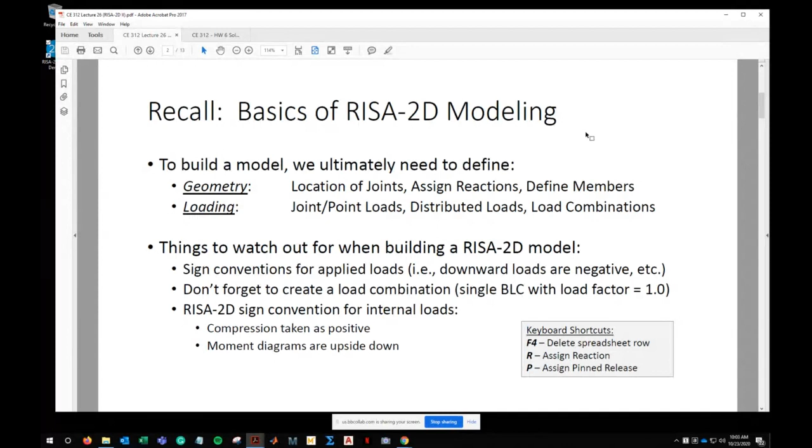Let's start talking again about RISA modeling. So let's review what we did last time. To build a model, we ultimately need to define two aspects of the model, the geometry and the loading. Today, we're going to add a third aspect to that, which is the stiffness, but we'll get to that. By geometry, I mean locating the points or the joints, assigning the boundary conditions or the reactions, and then defining all the members. By loading, I mean putting either joint loads or point loads on there, applying any distributed loads, and then building your load combos and running it.

These are some things to watch out for when building a RISA model. The sign conventions for your applied loads: the downward loads are negative, so make sure that you're good on that. Don't forget to create your load combination. It's really easy to forget to build that final step where you do a load combination with basic load case 1 with a load factor of 1. And then your RISA sign convention for internal loads: the moment diagrams are going to be upside down, and compression is taken positive. So when you're querying the results, make sure you keep that in mind.

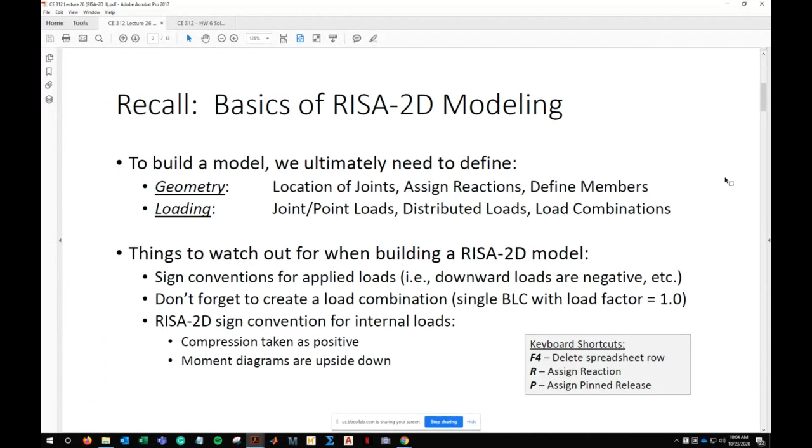Keyboard shortcuts. F4 will delete a row in a spreadsheet. R is what you use to assign a reaction, and P is what you use to assign an end release. Okay, before I get into deflections, I want to talk about some additional modeling items, and I just have kind of a slide on each of these.

It's nothing we really need to spend a lot of time on, but I kind of wanted to fill in some gaps. And so I want to talk about an internal hinge in a beam and a frame. I want to talk about roller supports that are inclined, and I want to talk about loads that are not vertical, that are at an orientation.

So let's start off with modeling an internal hinge. So if you want to model an internal hinge in a beam, let's say you've got a structural model and you want to put an internal hinge at a particular point. For instance, let's say we have an example here and we want to put a hinge right there, because we're going to do this problem later. What we would do is we'd put a joint at the point where we want to put a hinge.

And then what we do is we go into the member advanced data tab. So remember, when you build members, there's the primary tab and the advanced tab. The advanced tab is what you use to release the ends of the members so that you're modeling a truss as opposed to a frame. All you do is, if this is member 1 and this is member 2, you pin the end of member 1, on that right end. And that would create a hinge.

Usually when I do it, I do both. But in fact, if you do one, that should work as well. Again, it goes from how you model a truss. When you're modeling a truss, all the members are pin connected, so you pin the ends of every member. And it's basically the same thing here, you just place a pin on the end of the member where the hinge is going to be.

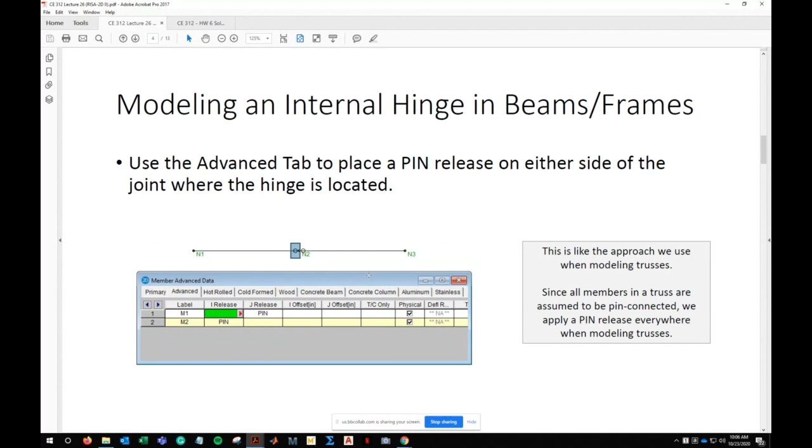And you can always tell that you've done that correctly, because if you look at your model, you'll see these little empty circles, like right here. I don't know if you can see that little empty circle. That empty circle indicates a moment release, and a moment release, that's a pin. That's a hinge.

What about an inclined roller? RISA does not allow you to model a roller at an incline. You can't really do that, but you can get around it and still get the same answer. So let's take this problem here. This is a problem I believe we did in class, and there's a roller that's inclined at 20 degrees. What you do is you pull the same trick. You put a hinge right here at the end of this member, so you can see how those little white circles indicate that I put a hinge on either end.

What you do is you draw a little short member that's at the same orientation as the reaction of the roller, and then put a hinge support right there. What you'll find is that if you compute I, the degree of external indeterminacy, both of these models are statically determinate, because you might have one more support reaction, but you also threw in an internal hinge. So the beam on the bottom and the beam on the top have the same condition.

As for modeling this little link, I'll call it a rigid link, what you do is you basically model it with an infinite stiffness, or make the stiffness sufficiently high, sufficiently rigid. The idea is that as the stiffness goes up, the deflections go down. So if the stiffness was infinite, then that joint would experience no deflection, and a joint that experiences no deflection is basically a support condition.

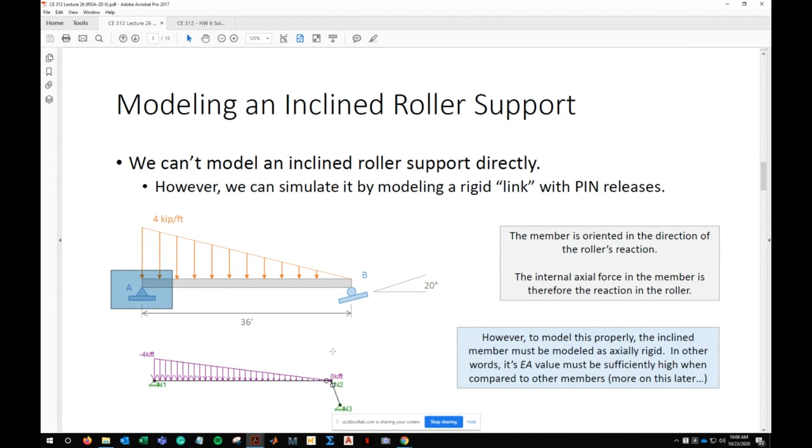In terms of modeling just a general load at an incline, RISA doesn't allow us to do that, but that doesn't really matter because I can take that and just model the X and Y components, and it's the same thing. So just use the slope ratio to compute the X and Y components and just model that. And so here you can see I've got this 20 kip load at a 3:4 slope ratio. I just modeled it as a 12 and 16 kip load.

Notice the signs. The 12 is positive. The 16 is negative because it's to the right and down. And also notice that I've modeled these as point loads, not joint loads. Remember, joint loads go on the joints, point loads go on the members. And so that load's applied to the member. I just put 12 and 16 kips at that same point to the right and down.

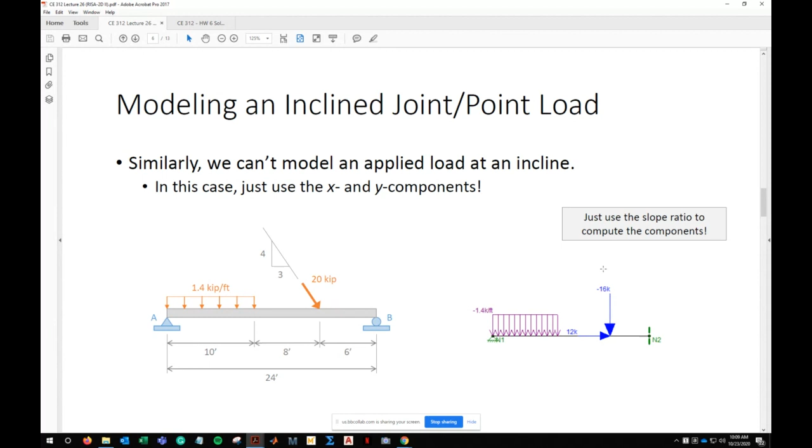All right, before I start talking about deflections, any questions? I know I probably threw a lot at you. I just wanted to sort of fill in some of the gaps before we move on. And I know one of the things with the inclined roller is that, in order to model it, you have to model that link as sufficiently stiff, as having a high rigidity. We haven't talked about what that means, but that's actually what we're going to talk about now. Any questions before we get into deflections?

All right, let's talk about deflections. So in order to model deflections, we have to introduce sort of the third aspect of our modeling. We have the geometry, we have the loading, and the third aspect that we need to get right is the stiffness. This word stiffness is really going to be kind of a key term for us later on throughout the semester. But basically, if you want a simple definition, stiffness is sort of the ratio between the applied forces and the resulting displacements. So a structure with a higher stiffness would result in lower displacements.

In modeling, what does that mean for creating a structural model? It means ensuring that you've got the E value specified properly for your materials, the Young's modulus.

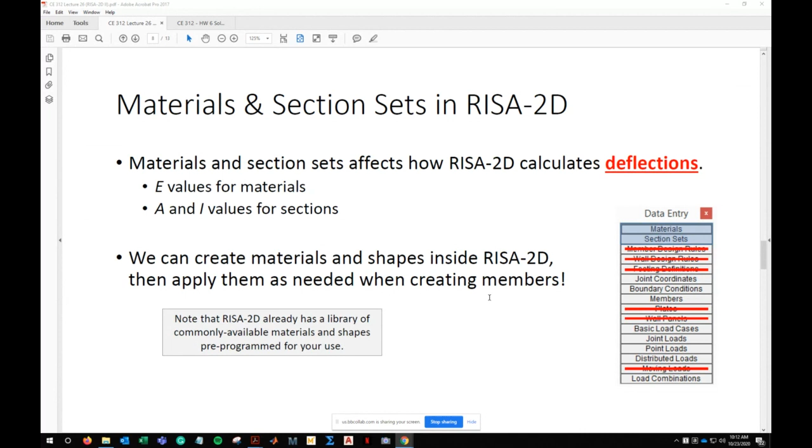The way that the process works is, in order to assign materials and section sets, what we're ultimately trying to do is affect the properties of the members. It doesn't affect the joints or the loads or the boundary conditions.

It's all about the members. So the first thing that you need to do is you need to look at your materials. Now we can build our own material, which is what I've done here. You can see I've created this thing called Greg's alloy.

So I went in here and I created Greg's alloy that has a Young's modulus or an elastic modulus of 25,000 KSI, and I left all the other properties 0 because I really don't care about them for the purposes of my analysis. So we'll say Greg's alloy has a Young's modulus of 25,000, and we create that.

The next thing that we do is we create the shape of the member. So the idea is, let's say I'm looking at my rubber beam, here you can see on the camera. So what I'm trying to do is define the material, what this thing is made out of, and then I'm trying to define the shape. And what I mean by the shape is this: this is an I-beam, so I'm trying to define the numerical properties that define this I-beam.

And so that might be its cross-sectional area, what's the area of this shape, the stiffness about the strong axis, and the stiffness about the weak axis. And I'll talk about what that means here in a bit. And so you can see here I've created a shape and I've called it Greg's shape.

Okay, and notice how Greg's shape has whatever properties I define, but then I assign Greg's alloy to that shape. So I've said here's a shape and it's made out of this alloy. We'll call it Greg's alloy. And so now I've got Greg's shape.

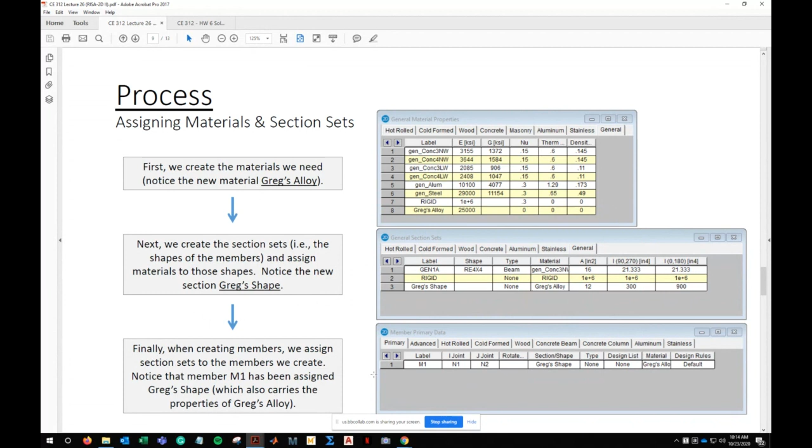One thing that I want to make sure that everybody's clear on is the moments of inertia. So if you look here on the table, if you specifically look at this part, there's 2 columns for moments of inertia. And it might be a bit confusing, like why is there an I and it says 90, 270? Why is there one that says like 0, 180? Like, what's the deal? The deal is the different ways that you can bend a beam.

So the way that I like to describe this is, if you're building, let's say, a deck outside your house, right? So here's the deck. You can see they've already dug their holes and cast their concrete piles, and they framed out the deck. Look at the joists here. See this joist. Notice how they oriented the joist so the long side is facing upwards.

Now, before you started learning engineering, if you've ever done any type of carpentry or work on your house or whatnot, that's just the way that you do it. That just makes sense. But there's a reason why you do that.

The reason why is if you compute the moment of inertia of this rectangle, because that's a rectangular shape, what you find is that the moment of inertia when the beam is facing upwards is much higher than the moment of inertia when it's facing sort of horizontal. So this would be sort of, we'll call it its vertical orientation, and we'll call this its horizontal orientation.

And so because the moment of inertia is higher, what it means is that beam is stiffer. It deflects less under the same amount of load. I mean, imagine if you had like a yardstick in your hand. The yardstick's really flimsy about that weak axis, and that's why we call it the weak axis. But if you try and bend it about its strong axis, it's pretty stiff.

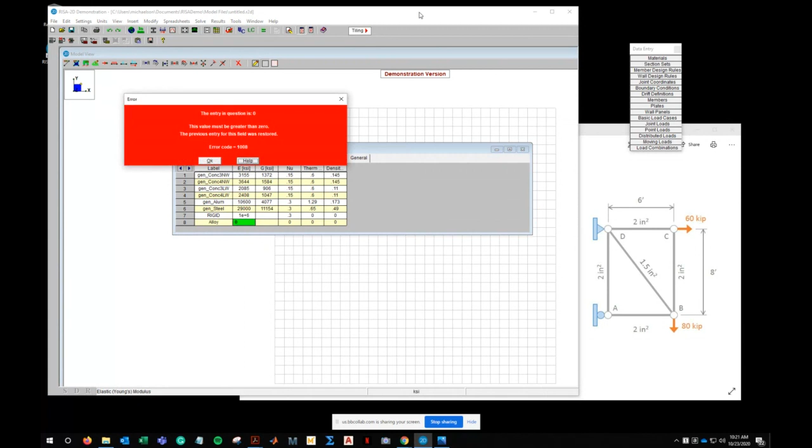I'm going to create my new material. We'll call it alloy. Okay. Now the problem states that E is 29,000 KSI, so 29,000, and we'll make everything else 0. You don't have to do that, but you can. I'm using the tab key, by the way. So if you're wondering, how is he going so fast? I'm just using the tab key to cycle through.

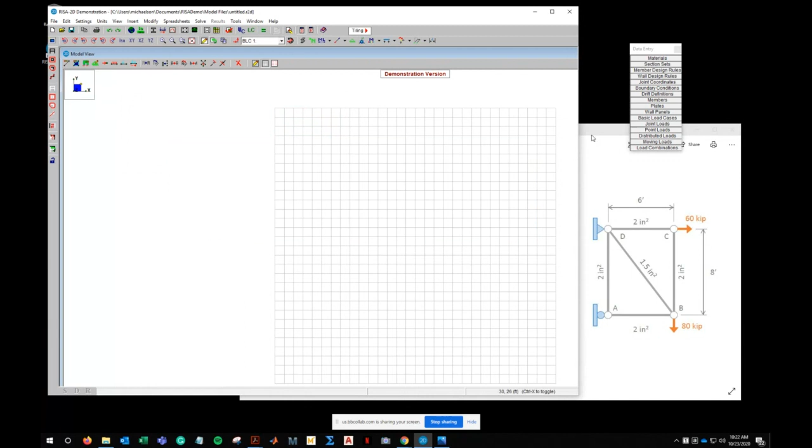Okay, and so I've got my alloy created, and I like to use the word alloy. I'm not a big fan of the word, but the word alloy doesn't really show up a lot in the native material property definition. So whenever I see the word alloy, it's like, oh, that's something I created, so I know it's the material I need. Okay, so there's the alloy, and it's already created. We can close that, and you can always reopen it, and you'll see it's still there.

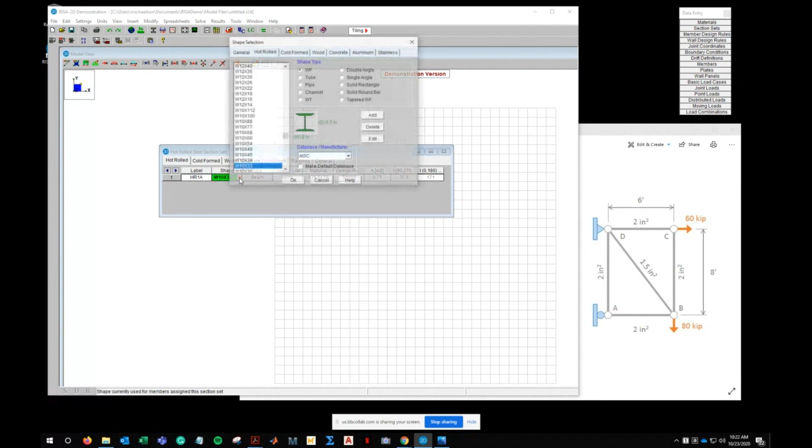Okay, so then we move on and we go into section sets. Okay, now I want to show you a couple things. So there's hot rolled section sets, wood, concrete, so on and so forth. What you can do is, let's say you're using a hot rolled section set. You can go in and say, well, the default is a W10x33. No, I want something else. I can check that, and look, all the shapes are already built in.

All the pre-built shapes, the W shapes, the channels, the angles, all that stuff is already there. You can even find Canadian shapes and Chilean shapes and Indian shapes. I mean, all these different standard sections are already here. What I'm going to do is I'm going to go into general, and I'm just going to make my own. I just wanted to show you that all that stuff is here. So we'll create our own shape.

Now let's go back. Let me move this up here. How many different shapes do I need? Well, remember with this truss, all the members had an area of 2 square inches, except for the diagonal that had an area of 1.5 square inches. So if I'm naming these shapes, maybe what I'll do is I'll name it T2 and name it T1.5. I just made that up, T2 and T1.5.

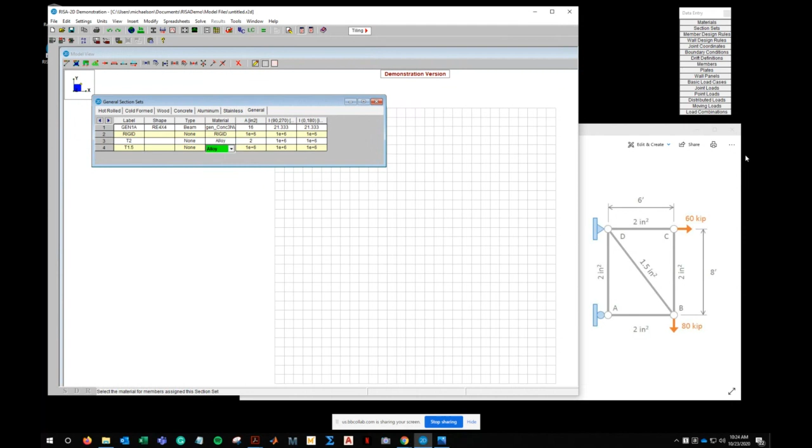As for the member type, I'm going to leave that blank. The reason for the selection is so RISA knows how to do the design checks. We're not in a design class, so we don't need to worry about that. The material, we'll change that material to alloy, and then we'll change the area. So the area here is 2, and this area is 1.5.

Now, one question I could always expect at this point is, some of you are like, well, Dr. Mike, I know what the areas are, but what about the I values? Well, here's the answer. I don't care what the I values are. The reason is by pinning the ends of the members when I model a truss, there isn't going to be any moment. And if there's no moment, and there's no flexural bending, the I value isn't going to affect my analysis. I'm just going to leave those as whatever value they are. You can see it's like 1 million. It's not going to affect anything.

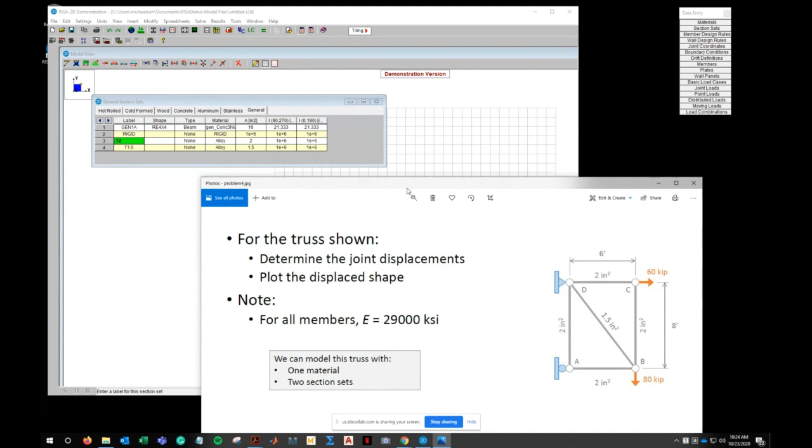Okay, let me close this spreadsheet. Okay, we haven't built any modeling yet. We've just done some of the work in the background with the materials and the section sets. But everybody with me so far? Any conceptual questions before we keep on trucking? All right, and please don't hesitate to interrupt if you got any questions.

Okay, I'm going to go now to start to define the joints. With this truss, I'm going to need 4 joints, so 1, 2, 3, 4. And turn my caps lock on. We'll call that A, B, C, and D. And as for the origin, I'll define A as the origin. So that's going to be 6 feet. That's going to be 6 feet. And that's going to be 8 and 8. So if I close this and maybe zoom in a little bit, there's my truss. You can see A, B, C, D. There's the 4 joints.

Okay. Yes, sir. If one of the supports had a moment reaction, would that mean that we would need I values for the entire truss? You're talking about a fixed support? Yes. That's a great question.

The short answer is yes, but keep in mind, trusses by themselves, when you pin the ends of the member, they carry no moment. Here would be my point. If you modeled this truss and only put a single fixed support, by pinning the members, what you're going to find is that moment reaction is 0, and then you're only going to have 2 reactions. A truss with 2 reactions is unstable, and so the model won't run.

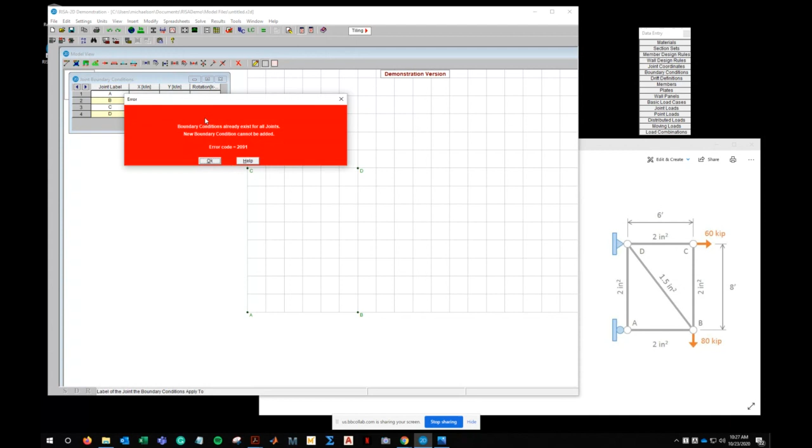Boundary conditions, we've got 1, 2, 3, 4. And again, if you press enter, it's going to get upset because you can't define boundary conditions for joints that don't exist. Okay, so here's my truss. Oh, I've got something labeled incorrectly. Hold on. I need to look. You can see here. Look at my C and D, I've got those backwards here. I need to flip those around. So maybe make this 6 and make this 0. I need to flip those around.

Nobody caught me on that. Shame on you. I'm just messing around.

Okay. So let's define our boundary conditions. Joint D. Joint D is a pinned reaction, so it's going to be R and R. So it's going to have a pinned support. What about support A? What's the reaction going to be at support A? Making sure you all are paying attention this Friday morning. There we go. Yeah. So X direction only. And so we just type the letter R. And again, I'm just using the arrow keys to go back and forth. Okay. So here's our truss.

Now, in terms of defining the members, here's how I'm going to do it. The first thing I'm going to do is ensure that the members are where they need to be. I'll assign the properties later. I'm going to need 5 members. So 1, 2, 3, 4, 5. Okay. So first off, let's just draw the members. So the first one is member AB from joint A to joint B. Then we'll do the next horizontal. We'll call that CD, from C to D.

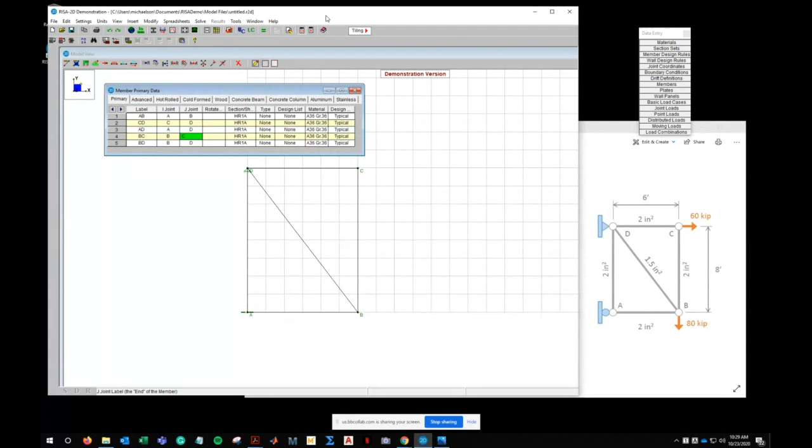So if you remember, all of the horizontals and verticals have an area of 2. So if you look at this right here, the horizontals and verticals have an area of 2, but the diagonal has an area of 1.5. And so I'm going to go into section sets, and let's test everybody's memory. If you go into section sets, remember what I named them. See how I named them like T2 and T1.5? So what I'll do is literally with my keyboard just type T2 down, T2 down, T2 down, T2, and T1.5.

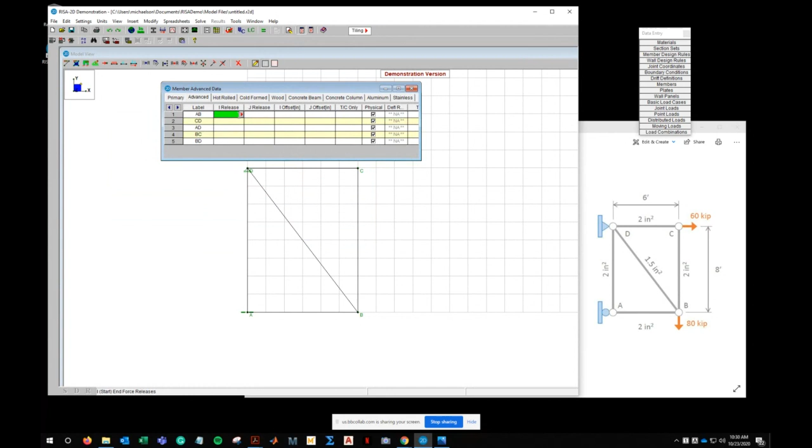And so I'm using the name that I assigned here, and look what it did. Not only did it assign the section, but look at the material. It knew that the material needed to be the one that I created. So all of that's already built in. Now, the final thing that needs to be done before we go on is this is a truss. So because it's a truss, we go into the Advanced tab and use that letter P and pin the ends of all those members. And you'll know that you've done that right because you'll see those little circles that show that the members are pinned.

Okay, now let's check this modeling out. I got 2 more things I need to do. I need to load it and I need to apply a load combination. We got 2 loads here that are applied at the joints. So before I do this, do you remember this button right here? I'll use my data entry toolbar to sort of point it. That button right there on the top left corner, we need to turn that on so that when we create the loads we'll actually see them. That's telling RISA to turn the visibility of the loads on.

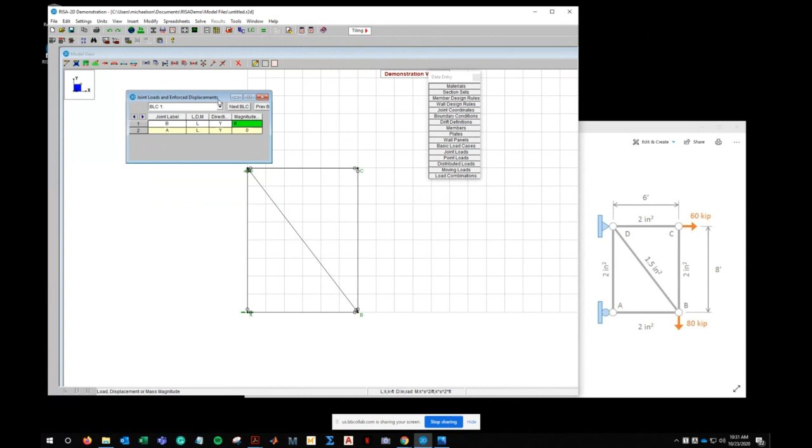We're going to do joint loads. I got 2 joint loads I need to create, one at C and one at B. Let's do it alphabetically. Let's do the one at B first. That's a joint load at B in the Y direction, -80, going downwards. For joint C, in the X direction, and that's +60. There you go.

Other than the load combination, which I'll go ahead and do that now, so don't forget the very end, load combinations, create a load combination and put 1 for a load case, a load factor of 1. You can do any one of those pairs. Now my model's done. Model is done, model is created, ready to analyze. I'm going to go ahead and analyze it.

So remember, we could do the solve button or the equals button. We'll do the equals button, hit solve. Boom, we are done. You know you're done because you'll get another toolbar that pops up. Here's your joint reactions. Let's look at the joint deflections. What did we get when we did this problem in class? I think we did the vertical deflection and we got 0.401 inches when we did this problem in class.

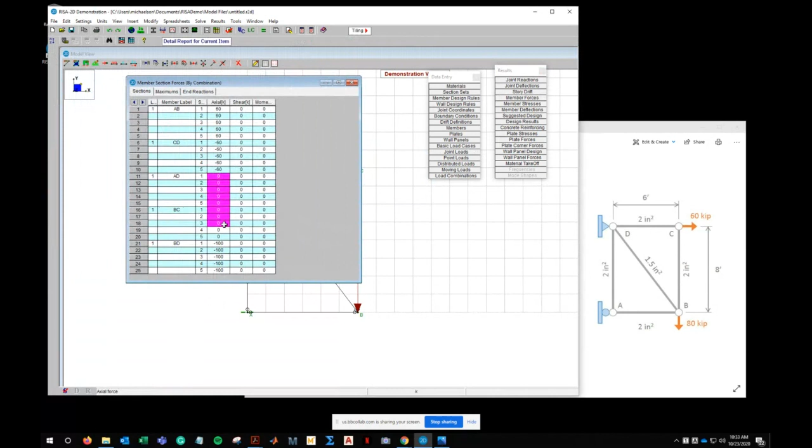Exact same answer here. Pretty slick, and keep in mind we got all the other answers that we also like. We got all the joint reactions. Here's the reactions. Here's the forces inside the members. Remember, we had some 0 force members in this truss. Pretty slick stuff. Let me show you a couple of things that I think are pretty slick.

First off, I want to show you the model display options. So view, model display options. So again, this is the same stuff we did before. We can turn on all the reactions, and now we can see all the reactions that are there. If you want, you can look at the axial force diagrams. Kind of boring because they're just constant forces along all the members, and so you can see, okay, we've got 60 kips in tension, 60 kips in compression, 100 kips in tension. Again, it's kind of boring.

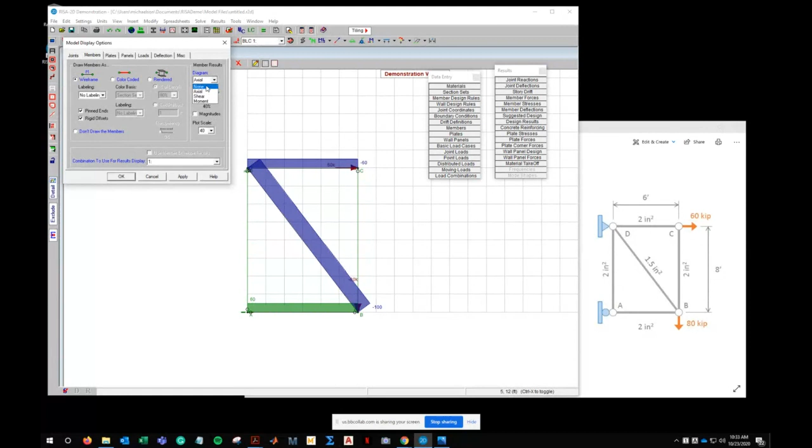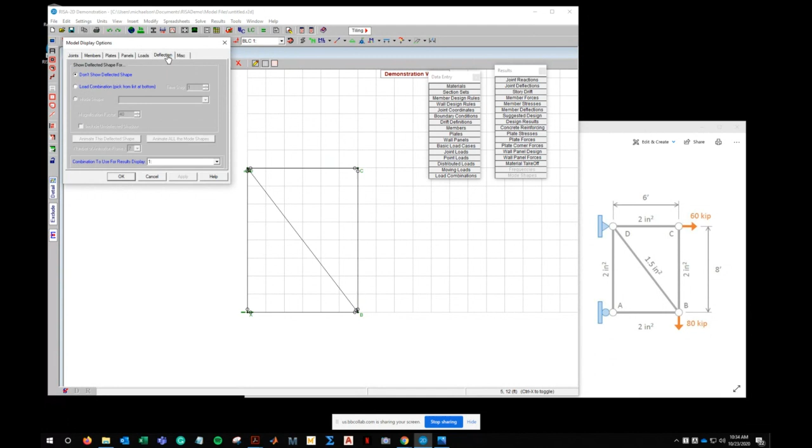But what I think is really the star of the show is the deflected shape. So what I'm going to do is I'm going to go into loads. I'm going to turn those loads off. I don't want to see those because I just want to see the structure. Now check this out. This is pretty cool. Let's go into deflection. Now I want to show the deflected structure, and let's hit apply. And what it does is it does that.

Now, first off, that looks probably a little wonky, but I want you to think about the numbers. This structure is what, like 8 foot tall, and it only experienced a deflection of 0.4 inches. What RISA is doing is it's magnifying those deflections so that you as the user can see them. It's using a magnification factor of 40. So maybe I'll tone that down a bit. Let's do a magnification factor of 20. Maybe that's a little easier, a little more realistic.

And if you hit this little check mark where it says include the undeflected shadow, now you can see what the truss looked like before and after. So this is before you apply the load, here's after you apply the load, and you can see how the truss forms. Notice at joint D, it didn't move at all. And at joint A, if it were to move, it would only move up and down. It wouldn't move left to right because of the reaction at A.

If I want to get fancy, I can animate that. And you can see it's going through that, start to finish. Just did 7 frames of animation. Any questions on this?

That's a great question. Can you change the way the loads are plotted? If I'm being honest, not really. RISA sort of has a standard way of plotting the loads, the boundary conditions, so on and so forth. Now, what you can do, let me turn the animation. Let me turn this off.

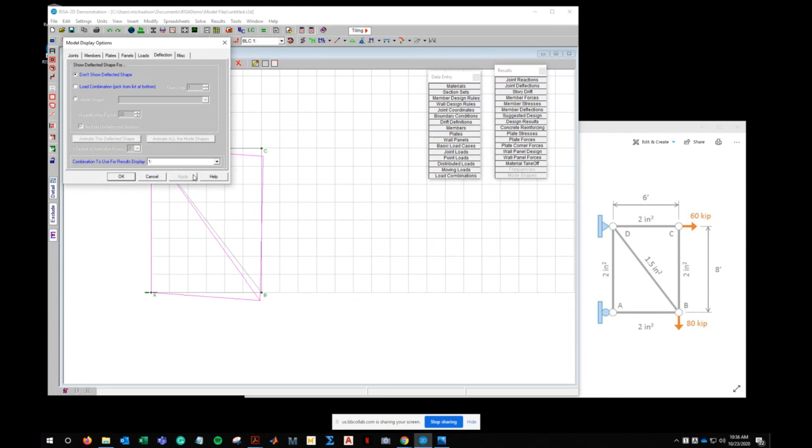Hold on. Turn the animation off. Now, one thing that you can do is you can turn some labels off. For instance, if you go up here, this little toolbar, I'll use the data entry. Like I'm talking about this toolbar right here, that right there. You can turn off the node labels.

You can turn off the boundary conditions. You can turn off the labels on the members so that all you're seeing is just the truss. You can do that. You can't really change the direction of how things are applied. I know there are a couple things that you'd like to tweak, but such is life. Any other questions?

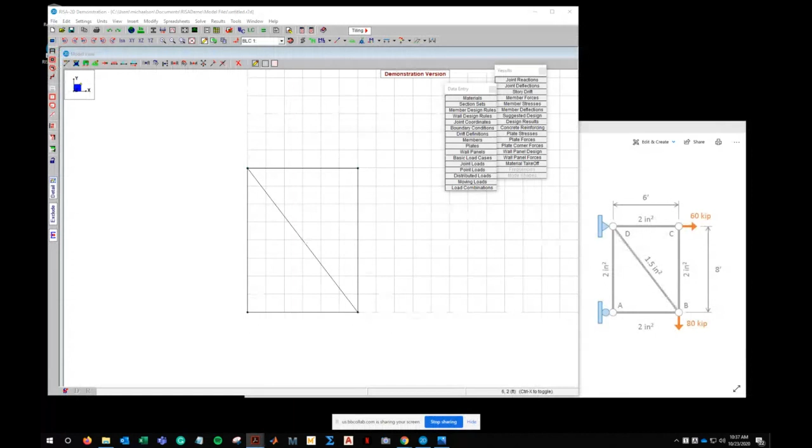Because I want to give you all a chance to model one of these on your own, and I'll build it with you near the end. All right, I'm going to pull up the slides. I want you to see if you can do this one. Okay, this is an overhanging beam. I want to determine the vertical deflection at B, the rotation at D, plot the deflected shape, so on and so forth. Now, let me say one thing.

In order to model this structure, you do not need to place a joint at B. However, placing a joint at B does make it a little easier to determine the deflections at B because RISA automatically says, okay, here's the deflection. So I want to model this structure in RISA. We'll go ahead and place a joint at B. We only need one material, one section set, 4 joints. We have distributed loads. We have a joint load at 15 kips.

I'm going to give you all a few minutes, and I want you to see if you can build this on your own. And I'll walk you through it near the end. If anybody has any questions while you're modeling it, please, don't hesitate. If you need me to blow something up or zoom into something, just let me know. I'm going to give you a few minutes on this. I'm going to close RISA. I'll reopen it and start from scratch.

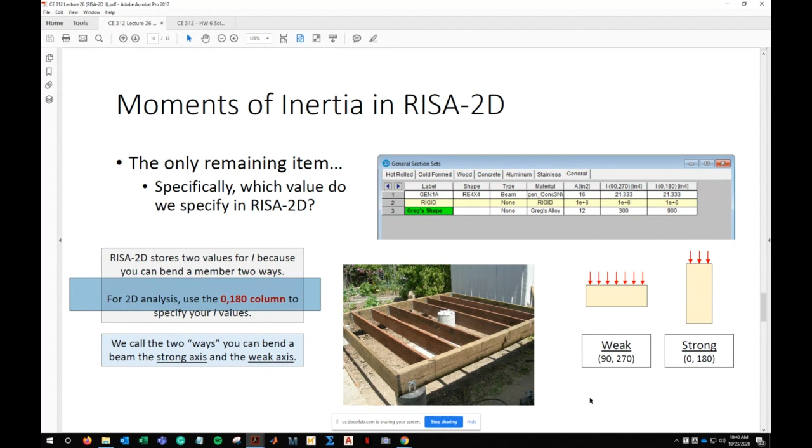No. Okay. First off, for 2D analysis, if you're defining your own section, you can honestly just make them both 1,000. But the one that's going to affect your answer is the 0 to 180 column. But you could just define them both as 1,000 and it wouldn't affect your answer because you're not deforming the beam out of the screen. Does that make sense? Yeah, I think I'm following.

I'll give y'all about maybe 2 or 3 more minutes, and then I'll start building it, and we'll play around with it.

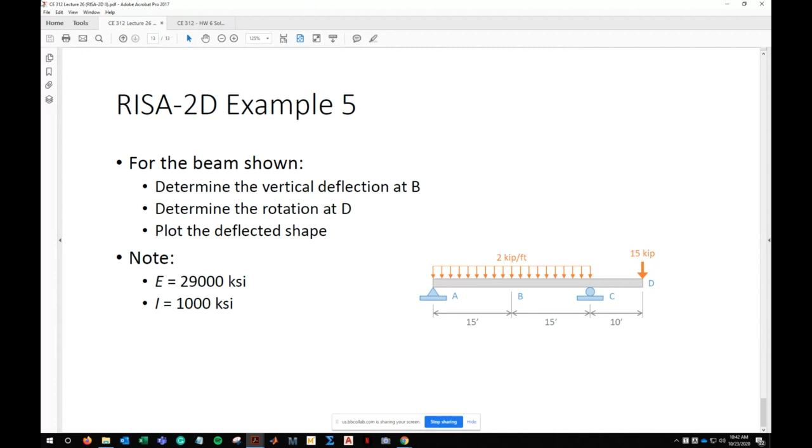You know of any way to prevent? Actually, I think I might. Give me a second. I'm going to minimize this. I think if you right click and go to display settings, what you can do right here is see where it says change the layout of text. I'll mess around with it and see what it does. Oh my! It's the same screen resolution, but it's making the text very, very large. So when I pull up RISA, oh man. Yeah, that's how I ended up fixing that problem on my monitor. A lot of software had that problem with scaling. I found in Windows 10 that's the easiest way to deal with it.

All right, I'm going to go ahead and start building the model. So I'm going to move this. Let me see if I can actually, hold on. Give me a second. I'm going to close this.

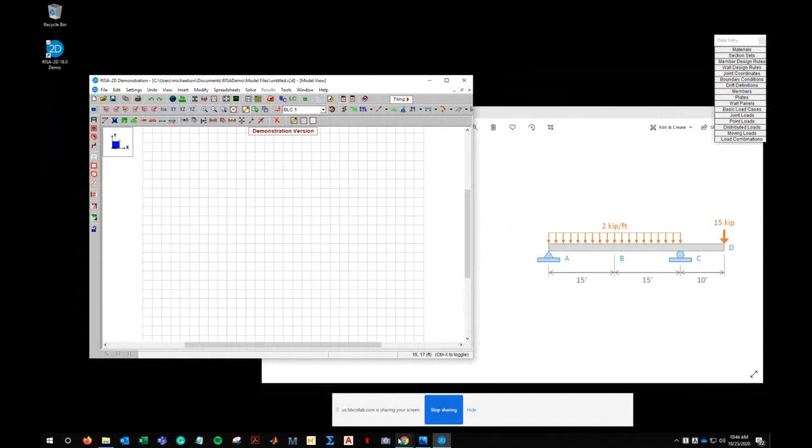Put that over there. All right, I'm probably going to do this kind of quick, but that's the beauty of the recording, is that you can always go back and review that. So first off, materials. We have one material and one section set that we need to define.

So we go into materials. Here we go. We go into materials, go to general. We're going to define a single material. We'll call it alloy, with a 29,000, and make everything else 0. I like to make everything else 0 because that sort of indirectly turns off shear deformation, so that when I'm checking like a homework or an exam problem, I get the exact answer by turning everything else to 0. All right, so that's my alloy.

Section sets. Turn on the general tab. We'll make a single section set, and let's come up with a unique name. We'll call it Greg's beam. It is made out of the alloy. And as for the moment of inertia, if you're in doubt, just make them both 1,000. Really, the second one is the one that impacts your analysis, but you can make them both 1,000. It's not going to affect anything. Okay, materials and section sets done.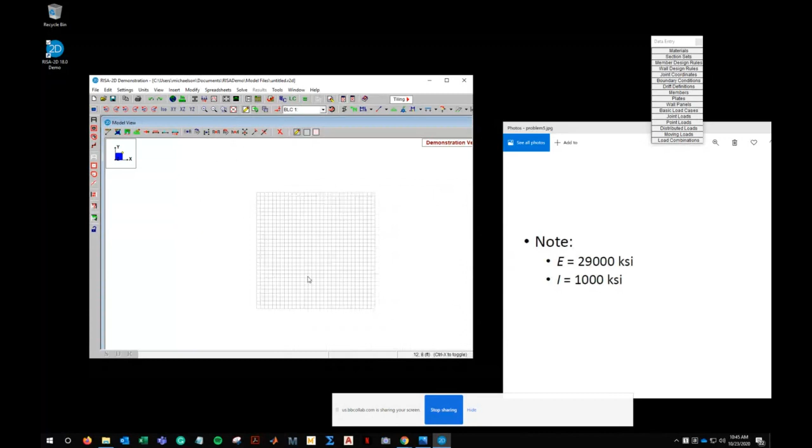Let's create some joints. So joints, we got 4 joints that we're going to create, A, B, C, D. Let me drag this over here a little bit so we can see the beam. So we'll take A to be the origin, so 0, 0. We'll say this is 15, 0. Say this is 30, 0, and say this is 40, 0. And so there's my structure. Let's go into boundary conditions. So A has an X and Y boundary condition. C is going to have a Y.

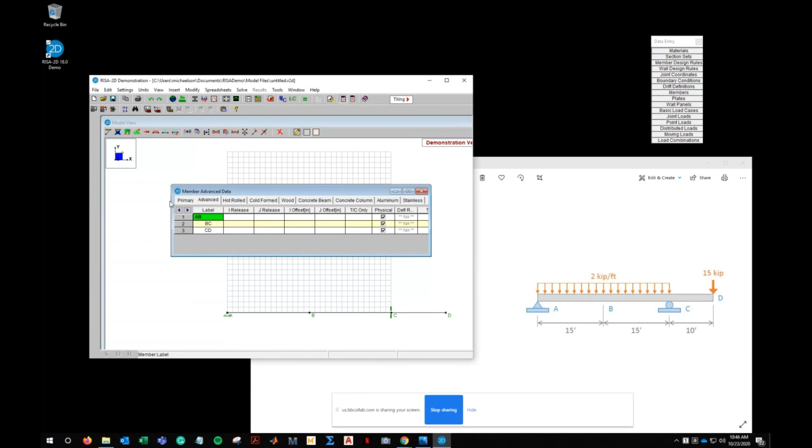Done there. Members. Okay, 3 members. And we'll call them AB, BC, CD. Now, I need to change the section set here to Greg's beam, but I do not make the ends pinned. This is a beam. Beams and frames do not have pinned ends. They have fixed ends. So don't go into the advanced tab and release these. Just leave it as it originally is.

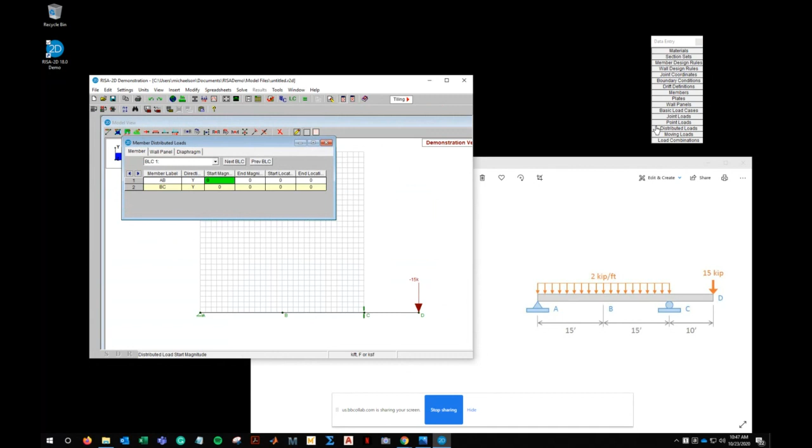Turn on my loads so I can display them. And then we've got 2 distributed loads, 1 joint load. So the joint load, let's do that first. That's on joint D. That's minus 15. You can see that there. The distributed loads. I got 2 of them, one on member AB, one on member BC. The start and end magnitudes are all minus 2. And by leaving the start and end locations blank, it default applies the loads everywhere, which is what we want on these members. Finally, on your load combinations, define a single load combination with a load factor of 1. Then we are ready to solve.

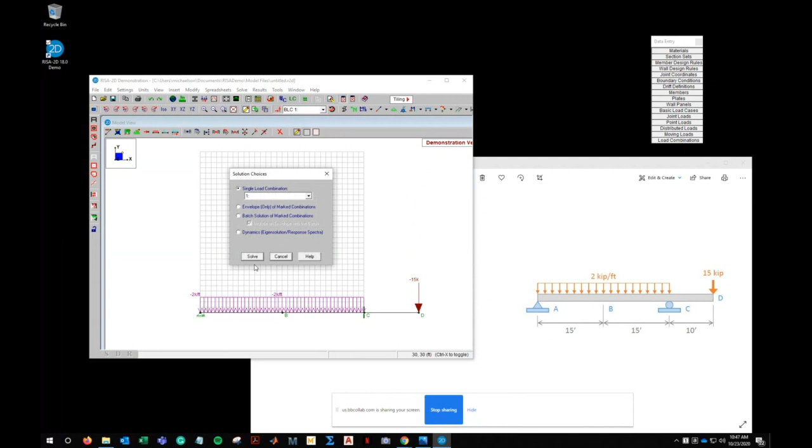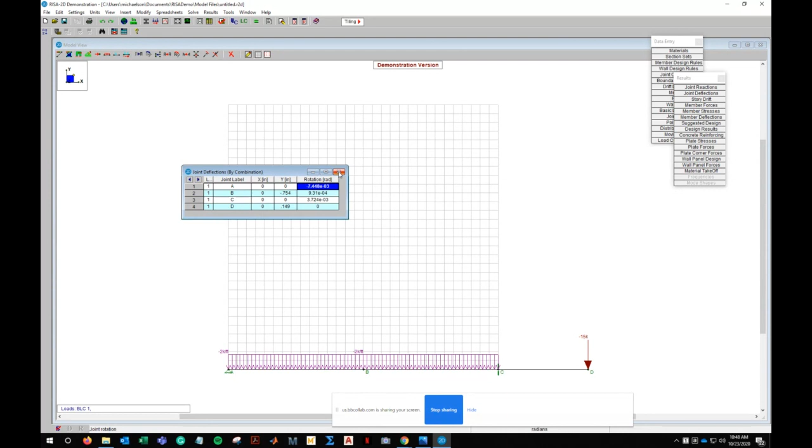Solve it out. Boom. Our joint reactions, deflections, all that stuff is done. Let's look at some results here because I think there's some pretty cool stuff to see. First off, we've got our joint deflections. Here you can see we've got joint deflections, and we also have rotations. The rotations are in radians. One of the things that's kind of deceptive but kind of interesting, look at the rotation at D. The rotation at D is 0. And that's actually really unique to this problem, and I'll show you why. Let me close this. I want to show you a couple of other things.

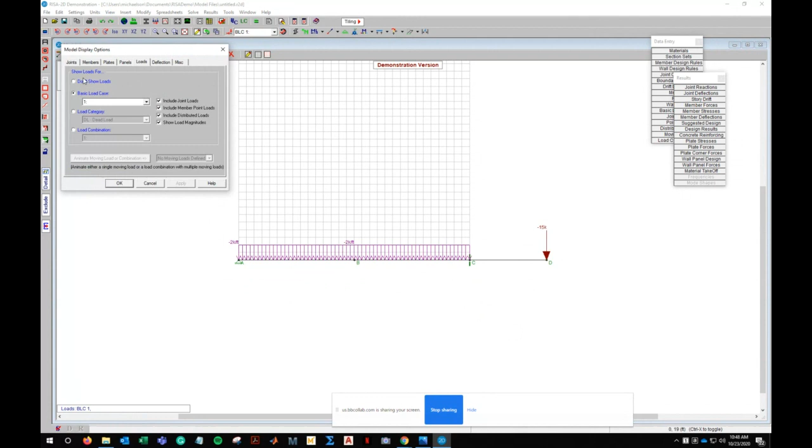So let's go to View, Model, Display Options, so we can show all of our reactions. Boom. Let me zoom out. Get that out of the way. So here's our reactions. Let's turn those off. Let's turn the loads off. Do I want to see the shear diagram? Boom. Turn the magnitudes on. There's your shear diagram. What about your moment diagram? Turn that on. Boom. Again, your moment diagram is going to be upside down, but that's okay.

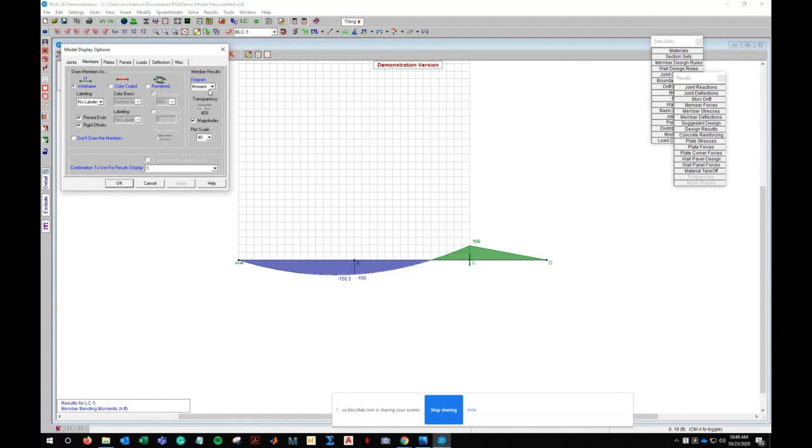Now, what about deflections? Let's turn the moment diagram off. Go to deflection. We'll show the deflection. Bam. And so here's what the deflected shape looks like. And what's happening at point D is that it's actually going back to being flat.

And so the fact that the result at D is 0 is really just that I sort of designed this problem so that that would happen. If I change that load a little bit or change that joint location a little bit, that wouldn't happen. 2 things I want to show you before we call it.

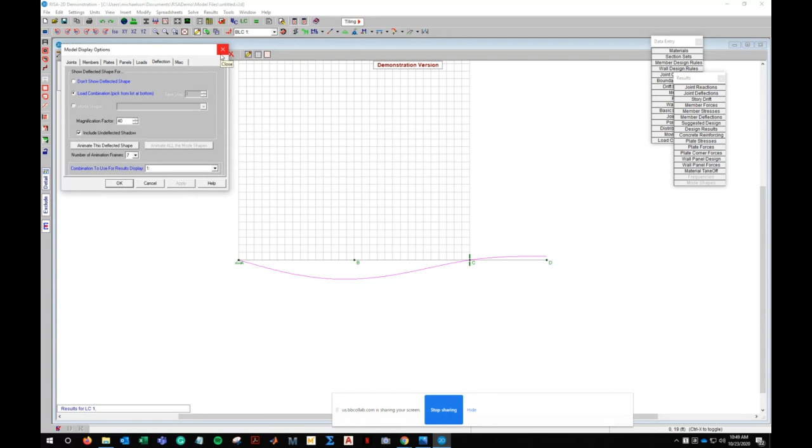If you look on the very left of your screen, there's a little thing here called detail. If you click that detail button, it sort of changes your cursor and makes it look a little weird. If you click on a particular member, it actually pulls out like a report where you can see, okay, that's what the shear diagram looks like on that member.

That's what the moment diagram looks like on that member. That's what the deflected shape looks like on that member. So if you want to zoom in on a detailed report for a given member, you can do that.

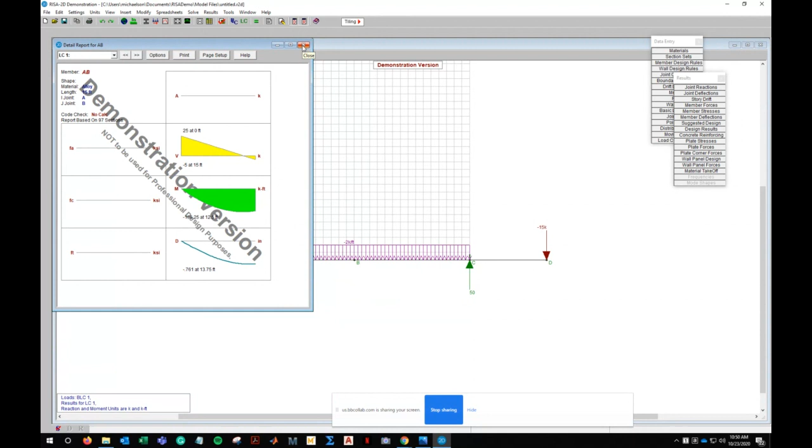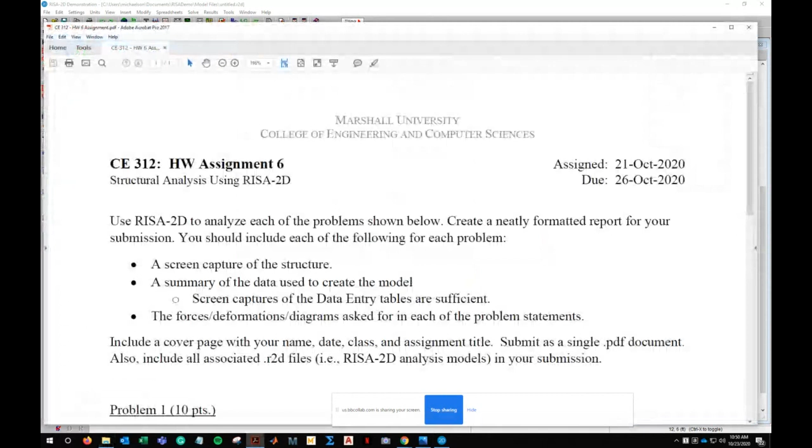The thing I do want to talk to you about before we close class today is something about your homework. Let me pull up your homework assignment. This is your homework assignment that's due Monday, and I actually made it worth 20 points, not 10, because it's like our one RISA assignment.

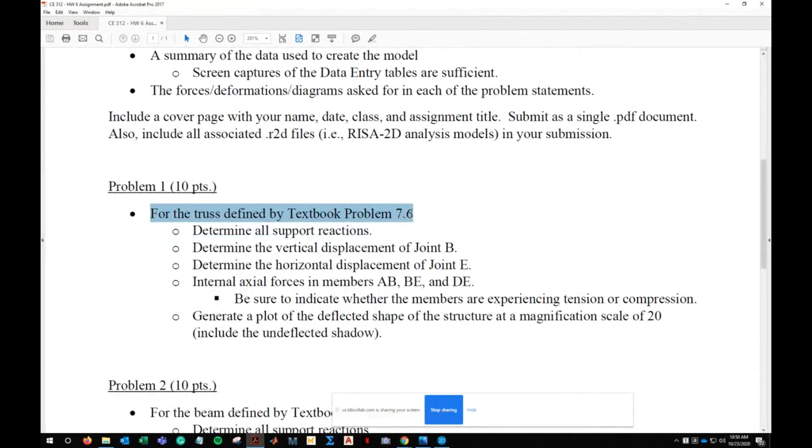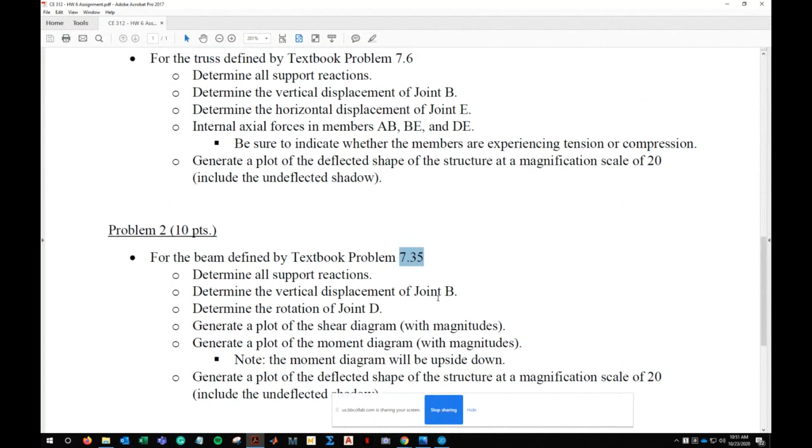So what you're going to do is you're going to take a truss and you're going to take a beam. So there's one truss, one beam, and I picked everybody's favorite beam. This is problem 7.35, the one that we just did, the one that had all those moment functions, because it's like the beam that you can't get away from. For the truss and for the beam, I want you to determine all the support reactions.

I want you to determine the displacements and rotations of certain joints on the structure. For the truss, I want you to determine some internal axial forces. Make sure that you tell me whether or not they're experiencing tension or compression. And I want you to generate a plot of the deflected shape at a magnification scale of 20.

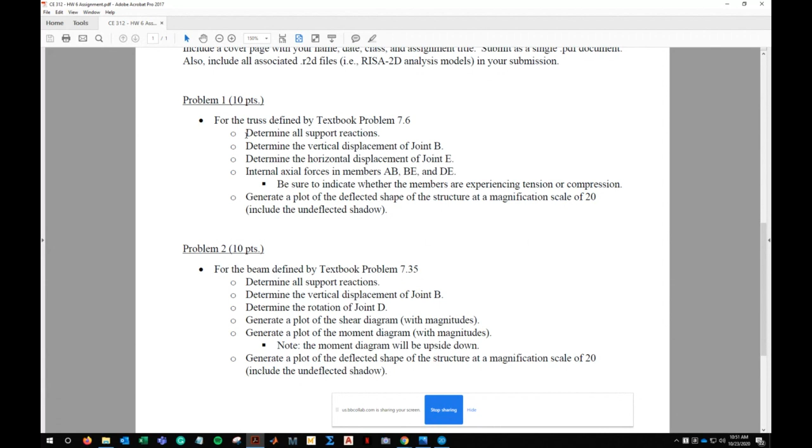Same thing, I want a deflected shape with a magnification scale of 20 for the beam. But I do want the shear diagram and the moment diagram for the beam as well. The moment diagram is going to be upside down. That's okay. And then the way that you're going to turn this in is I want basically a single PDF with all this, so you could build it in Word and just add it.

This doesn't have to be the neatest thing in the world. You don't have to write this like it's a master's thesis. But I do want it to be somewhat organized. For each problem, you should have a screen capture of the structure, which you could just use your snipping tool in Windows or Apple or whatnot. I just need the screen capture of the structure.

I want a summary of the data that you use to build the model. And so that could be screen captures of the data tables. That's fine. And I want all the forces, the deformations, all that stuff that the assignment's asking for. Just make sure you include a cover page. Submit that as a PDF. And you can also submit in Blackboard the RISA files, the R2D files. And so you can submit it all by Monday. Any questions?

I had mentioned that earlier. Give me a sec. That was in the lecture notes. So if you're defining a member, this is why you don't draw a single member from end to end, because if you need a hinge at a particular joint, you just go into the advanced tab and then release the ends of the member where the internal hinge is. So if you've got an internal hinge at node 2, release member 1 at the right end and release member 2 at the left end.